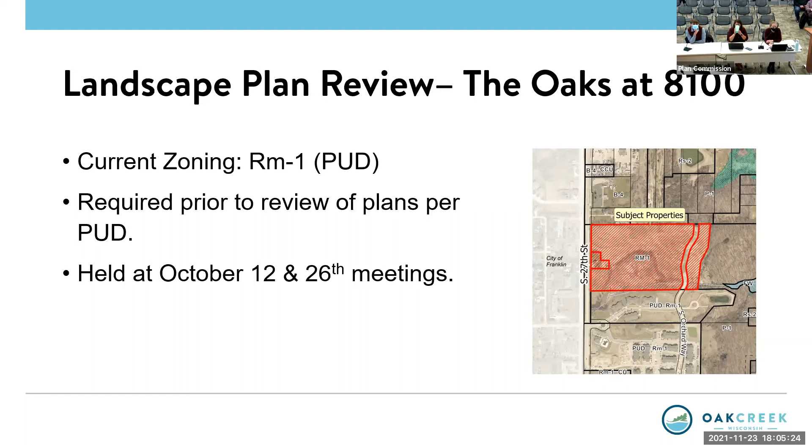This was required prior to review of site and building plans per the PUD, and we have landscape plans that are a little different than what was previously presented. Overall, this is how we are approaching the landscape plan for the entire development. We're going to talk about these in four quadrants, just to make it a little easier for review.

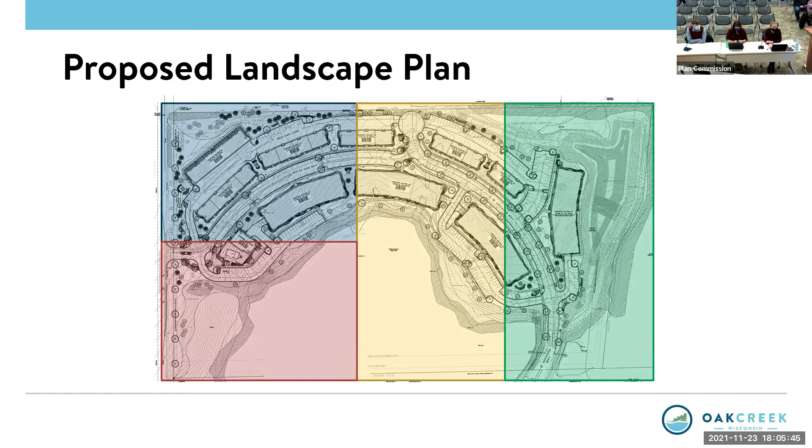The northwest quadrant is talking about the screening for those buildings. The A1 building is the tallest, and also has the most units. It steps down toward the townhomes in the B1 building. You'll see landscaping areas around the base of these buildings, and some tall landscaping items to screen them from the properties to the north. You also have landscaping around the clubhouse area, around the transformer areas, and then some street trees.

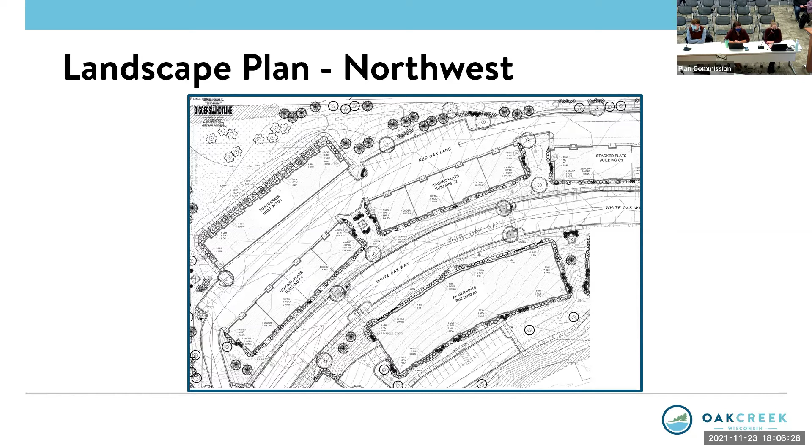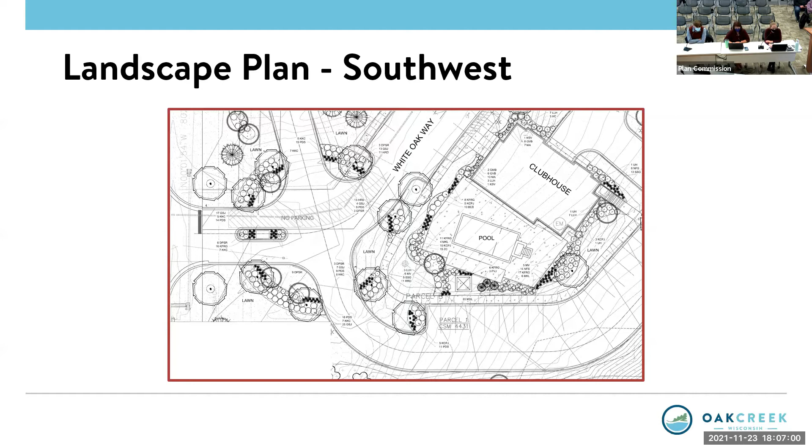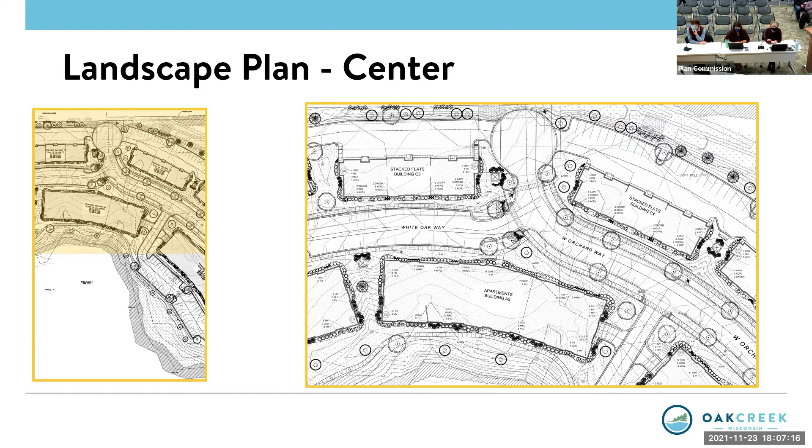In the center, we continue the landscaping around the perimeters of the buildings, adding a bit more along the north side. We don't have as much of a dense buffer here to the property to the north, because that property tapers off into more of a landscape area.

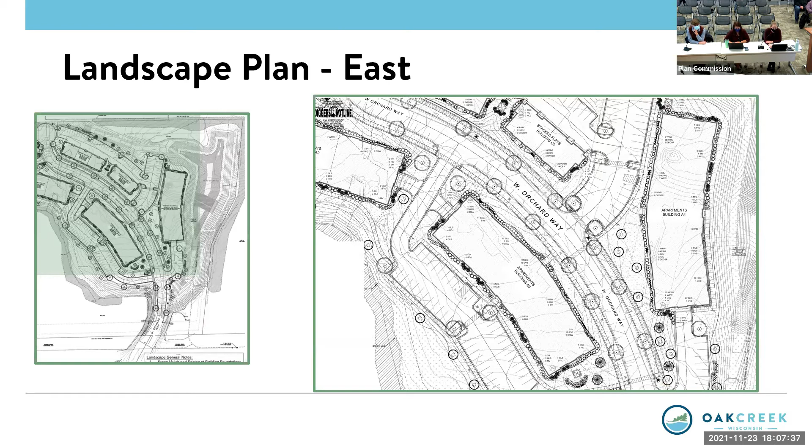And the street trees along West Orchard Way are per the requirements for the city, continuing from the center down West Orchard Way. And again, perimeter landscape along the buildings and in between.

So with these plans, we are recommending that the Plan Commission approve with the condition of approval that is on the screen. Mr. Mayor, thank you, Carrie.

Before we move ahead, applicant, would you like to make a statement, or are you just going to wait for any questions? I think just wait for questions. Okay, it's been indicated Mr. Decker will wait for some questions. So we'll go on to the commission.

Commissioner Hanna, you want to start us off? Yeah, I have no questions, thank you. Commissioner Sullivan: I have no comments, thank you. Commissioner Carrillo: Nothing for me. Alderman Lorik: No questions, thank you. Alderman Guzekowski: No questions, thank you. Commissioner O'Danny: Nothing for me. Commissioner Seifert: No questions at this time. Commissioner Chandler: No questions. Me neither.

So away we go, if somebody would like to make a motion on 7A. I move that the Plan Commission approves the master landscape plan for the Oaks at 8100 submitted by David Decker Properties for the properties at 8100 and 8146 South 27th Street and 8100 South Orchard Way, with the condition that all detailed, revised, and finalized plans are submitted in digital format to the Department of Community Development prior to submission of permit applications. Seifert seconds.

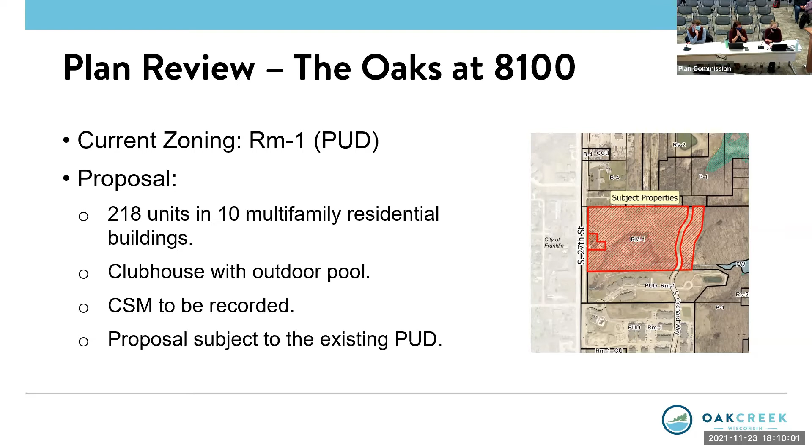We did look at the clubhouse with the outdoor pool. The CSM to redivide and combine these properties is yet to be recorded, so that's forthcoming before building permits can be issued. And this is part of a PUD, so we did have the conditions and restrictions as part of your packets to refer to.

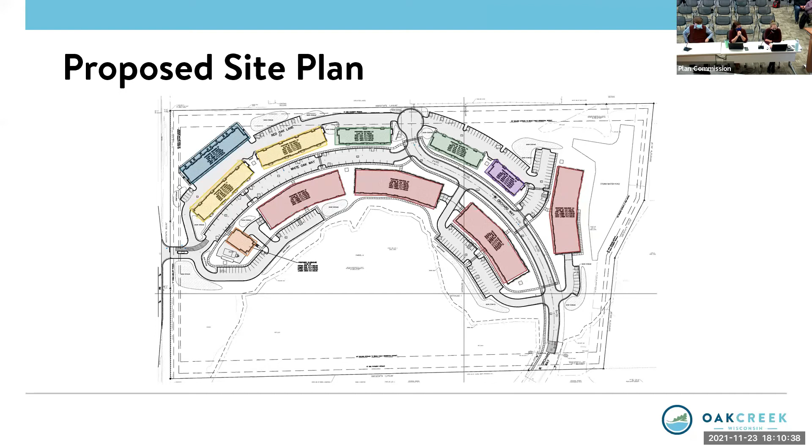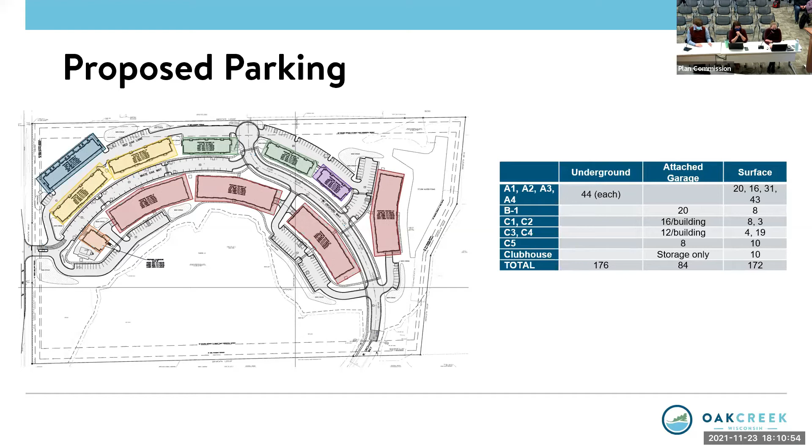On the proposed parking, we did talk about underground, attached garage, and surface parking. The attached garages are in the townhomes, so that B1 building. Underground parking for the buildings are in the table here, as well as surface parking. It does comply with the requirements for the PUD.

Elevations for each of the buildings, similar materials for each of them, cement board siding and brick. We did discuss this at length during the PUD discussion. No vinyl is proposed on here. So again, cement and brick to match what the code requirements are.

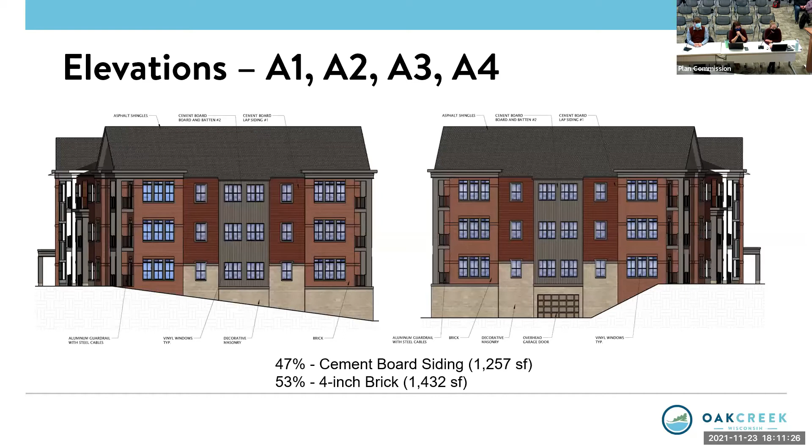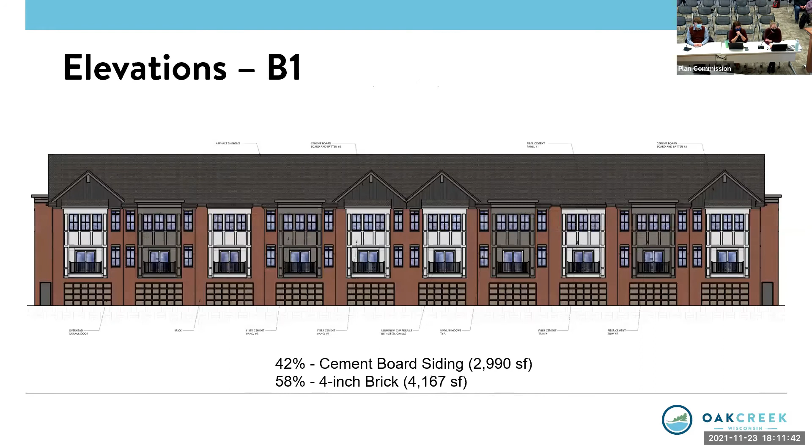It will be up to the Plan Commission to determine whether or not these percentages for each of the facades are acceptable. It does need a 3/4 majority approval for the use of fiber cement, and just a reminder of the 65% brick masonry and glass requirement for multifamily residential. But again, the use of cement board is up to the Plan Commission, and it's up to you to determine whether or not these percentages are acceptable.

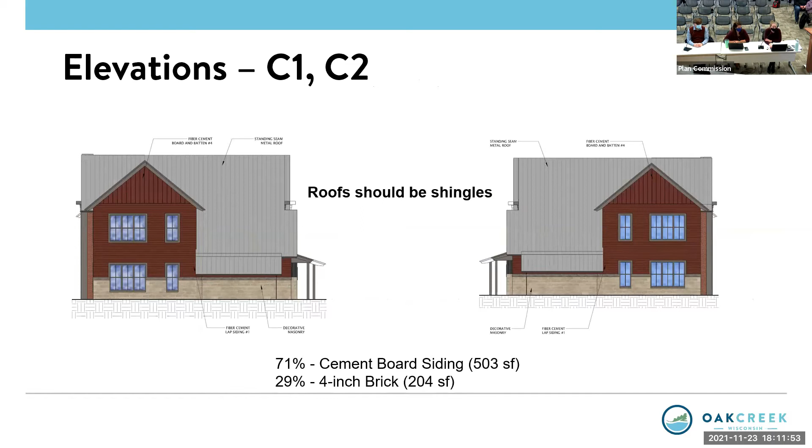So I'm going very quickly through these. This is just a holdover from a previous plan. It is an error. The metal roofs will be shingles to match the rest of the buildings.

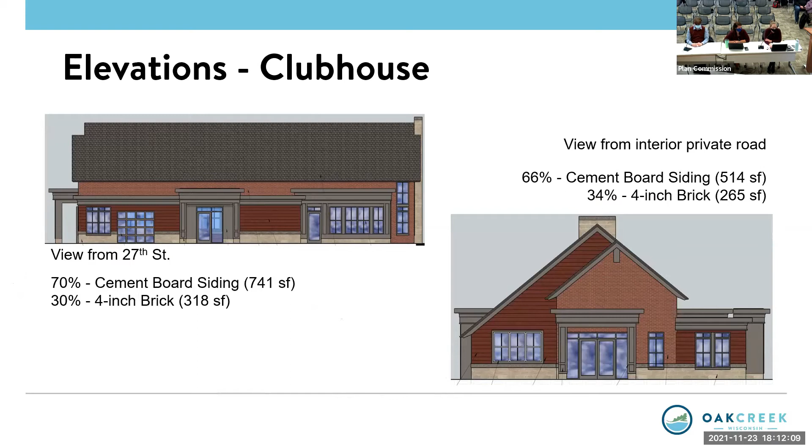Clubhouse, again, similar to the rest of the buildings. We did have an allowance in the PUD for the height restriction to be greater than the 17-foot for accessory structures.

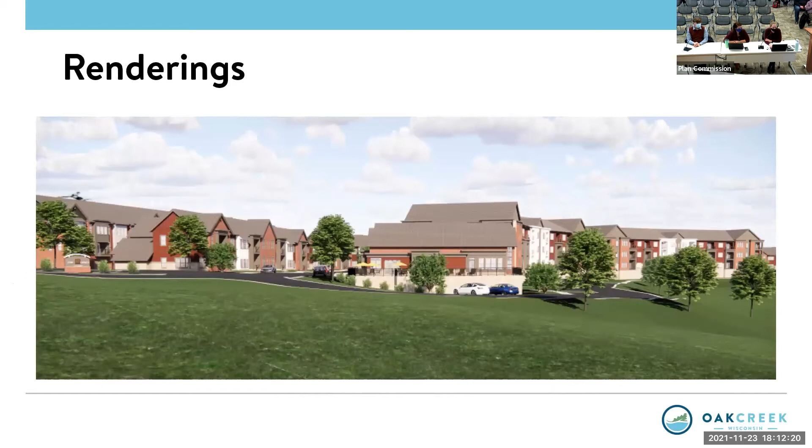To remind you of what the property and development will look like, here are the renderings we have seen previously, the entry to the development from 27th Street. The sign is a placeholder. It will meet the requirements of code per the PUD, and we worked with the applicant and their consultants on the dimensional requirements. It's a placeholder because we don't have the design finalized yet.

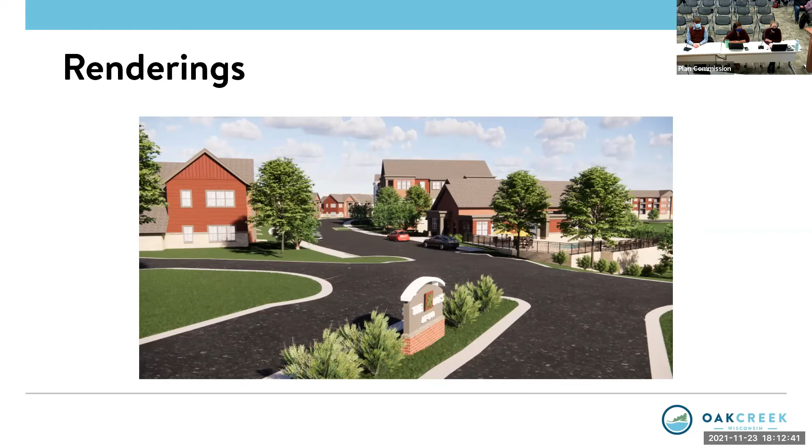And with that, there is a suggested motion for approval on the screen, one of two, with conditions for Plan Commission consideration. Mr. Mayor. Thank you, Carrie.

We'll open it up, Commission, for questions and comments. Chauncey, you want to start us out? No questions. Fred? No questions. Don? No questions. Chris? No questions, looks good. Greg? I have no questions, thank you. Dawn? Nothing for me. Matt? I have no questions. Christine? Nothing here, thank you. And again, nothing on me.

We've been over this quite a bit. We've really brushed through this one quite a bit, so I think we're all in good shape. Appreciate all the work that staff did, along with the applicant, to get us to the point we are. I know it's tedious sometimes, but I think we wound up at the right conclusion with a lot of this. So thank you all. So with that, motion, please.

Lorick moves that the Plan Commission approve the site and building plans submitted by David Decker, Decker Properties, for the properties at 8100 and 8146 South 27th Street and 8100 South Orchard Way with the following conditions. Number one, that all relevant code requirements and conditions of the planned unit development remain in effect. Number two, that copies of wetland fill permit approvals by the Wisconsin DNR shall be provided to the city prior to the submission of building permit applications.

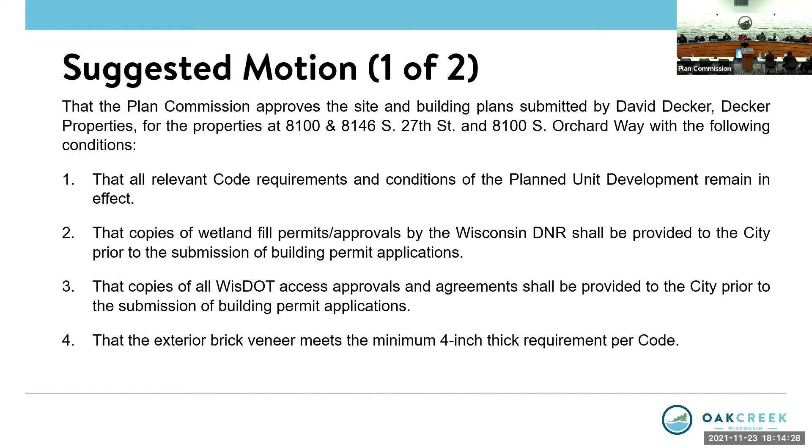Number three, that copies of all WISDOT access approvals and agreements shall be provided to the city prior to the submission of building permit applications. Number four, that the exterior brick veneer meets the minimum 4-inch thick requirement per code. Number five, that all mechanical equipment, transformers, and utility boxes, ground, building, and rooftop shall be screened from view.

Number six, that all stormwater, water, and sanitary sewer requirements are coordinated with and approved by the engineering department and Oak Creek Water and Sewer Utility prior to the submission of building permit applications. And number seven, that all revised plans, site, building, landscaping, etc., are submitted in digital format for review by the Department of Community Development prior to the submission of building permit applications.

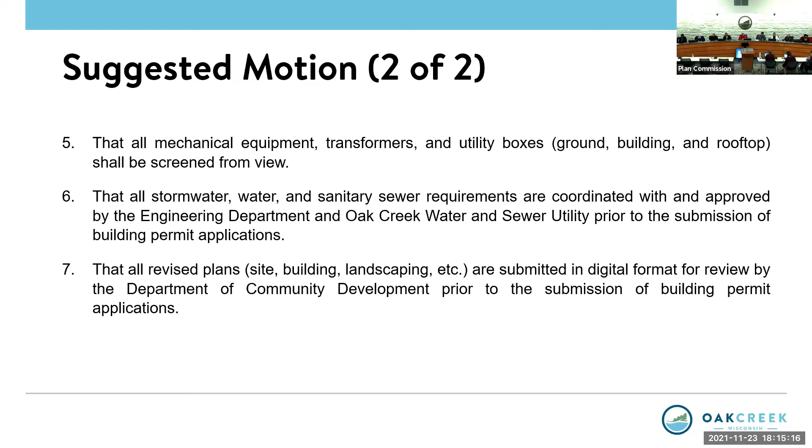New business, item 8A, consideration of a conditional use permit amendment, request by Timothy Grayman, All-Star Buick GMC, for an amendment to the existing conditional use permit to include the property with the former address of 7070 South 27th Street.

Thank you, Mr. Mayor. It's pretty straightforward. This is the current All-Star Buick GMC dealership. It is zoned B4 and has a conditional use permit attached to it. It is also located in the RRO overlay district. Unfortunately, that existing conditional use permit did not extend to the corner property because they did not have ownership of it at the time the permit was requested. So the request is basically asking for that to be incorporated into the CUP and be subject to those conditions and restrictions. There was a requirement that they post an escrow in case that corner were ever put up for sale by WISDOT so they could acquire it, and that happened in 2019.

No other changes to the conditional use permit are proposed with this request. One point of clarification: the certified survey map that combines the two properties still needs to be recorded. That needs to happen before anything can happen on that corner property. And the conditional use permit request does need to go before the Common Council to be approved, incorporating this into the conditions and restrictions. So just a point of clarification there. There's a suggested motion for approval on the screen.

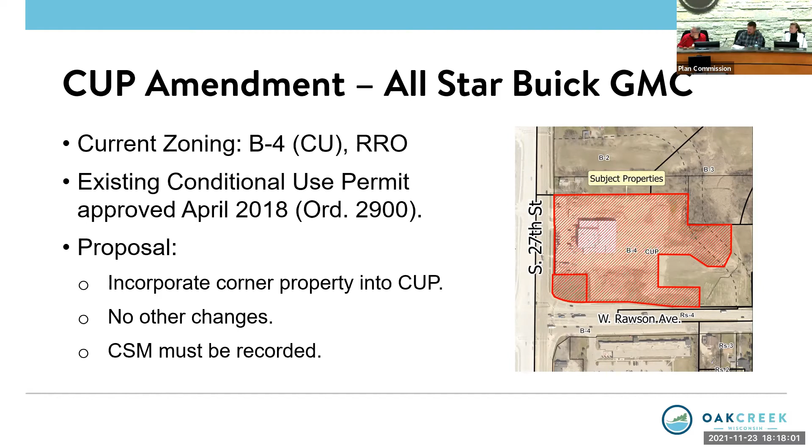I myself know Carrie made it pretty clear. Unfortunately, they did start the work, but nonetheless, they were going to obtain the property, so we are where we are. Nothing further, other than next time, let's follow the procedure. I like consistency. So with that, motion?

Sleeper moves that the Plan Commission recommends that the Common Council approves a conditional use permit amendment adding the land with the former address of 7070 South 27th Street after a public hearing. Point of clarification, it is 7070 South 27th Street. I'm sorry, I thought, okay.

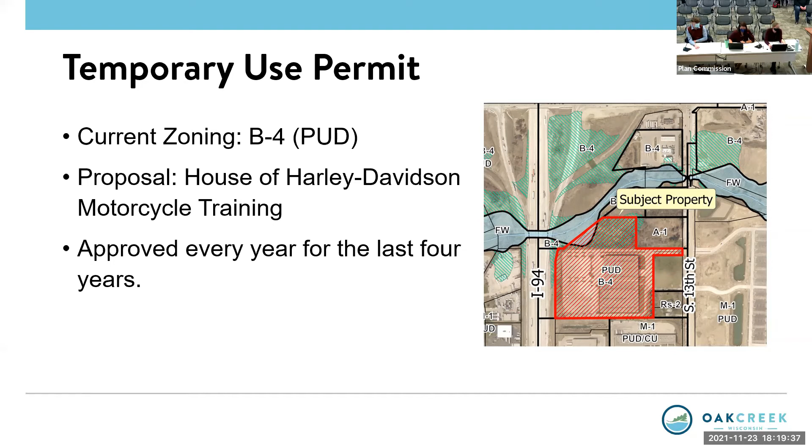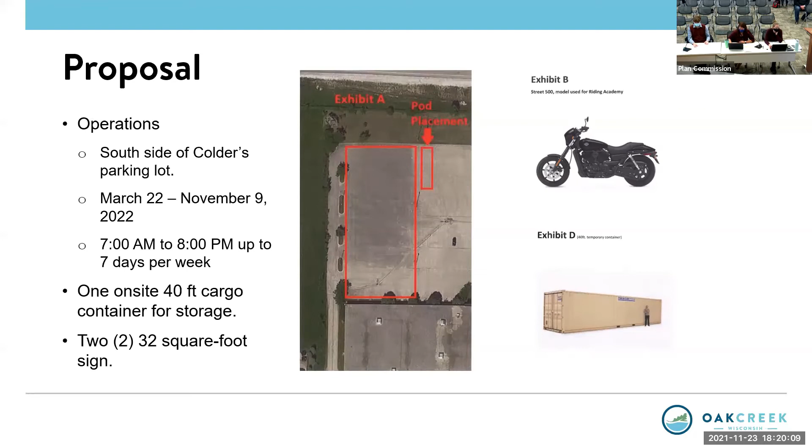Lori. You got it, it was the eye contact. Yes, Mayor, this is for a temporary use permit for the House of Harley Davidson. As you may recall, this has come up every year for the last 4 years. Staff have not gotten any complaints about their operations. The operations are going to stay the same, on the south side of Colder's parking lot between 7 a.m. and 8 p.m., up to 7 days a week. Really, it's only going to be 7 days a week if there's rain during the week, so they're extending that time period. This will also include the on-site 40-foot cargo container for storage of the motorcycles, and will also allow for 2 32-square-foot signs. I provided a suggested motion that we've used every year for the last 4.

Thank you, Lori. Very quickly, before we go to the commission, Carrie was emailed, and I'd like to read that email into the record as it was pointed out to my attention. It should be.

Subject was a temporary use permit at Colder's, addressed to Carrie. Although I cannot attend the planning council meeting regarding the temporary use permit for One Headlight Power Sports at Colder's, I wanted to provide some input. Our property is at 8975 South 13th Street and is an immediate neighbor, and we are also the manager of Creekside Corporate Park to the south of the proposed location.

This temporary use has been conducted before, and we have found it to be harmless. In the past, it has been well run and caused no problems for any of us, our tenants, in the building to the south. To us, it seems like a fine location for this kind of low-frequency event, and as a result, we would encourage the Plan Commission to approve the request. Please feel free to contact me. All the best, Mike Faber, Principal, Capstone Quadrant.

Okay, with that we'll go to Commission. Chauncey? No questions. Fred? No questions. Don? No questions. Chris? No questions. Greg? I have no concerns. Dawn? Nothing for me. Matt? No questions, thank you. Christine? Nothing here. No, nothing from me either.

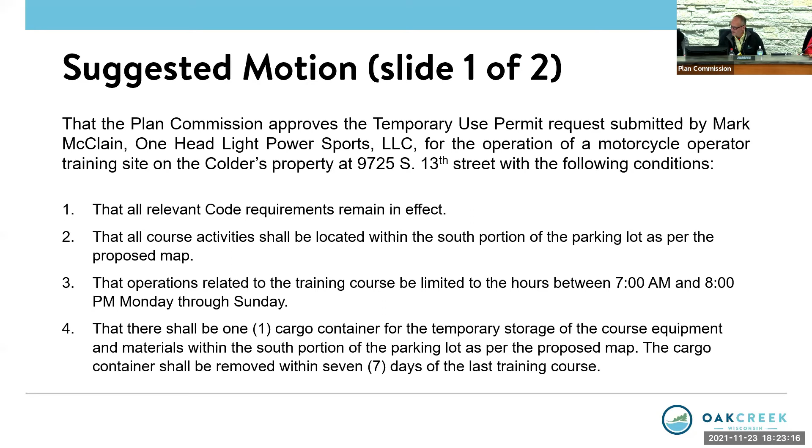1, that all relevant code requirements remain in effect. 2, that all course activities shall be located within the south portion of the parking lot as per the proposed map. 3, that operations related to the training course be limited to the hours between 7 a.m. and 8 p.m. Monday through Sunday. 4, that there shall be 1 cargo container for the temporary storage of course equipment and materials within the south portion of the parking lot as per the proposed map. The cargo container shall be removed within 7 days of the last training course.

5, that the signage for the operation be limited to two 4x8, 32 square foot each temporary signs on the cargo container. And 6, that the temporary use permit shall be valid between March 22nd, 2022 and November 9th of 2022.

Second. Roll call, beginning with you, Chris. Guzekowski, aye. Ladani, aye. Seifert, aye. Chandler, aye. Anna, aye. Sullivan, aye. Bill, aye. Clark, aye. Kevich, aye. Great, thank you very much.

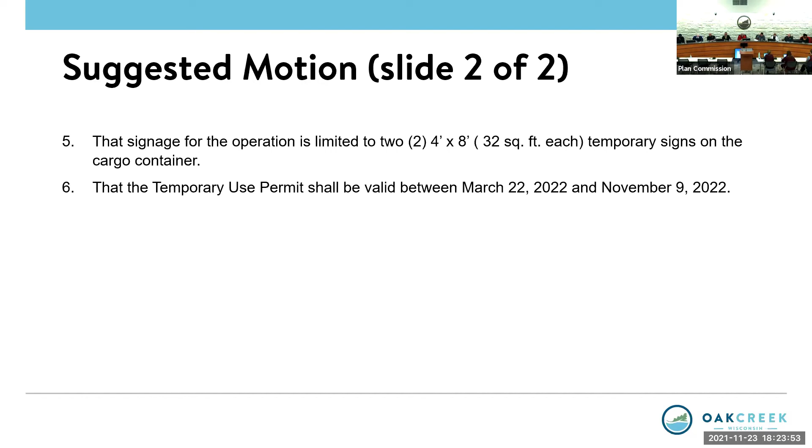That will get us to 8C, a plan review of building, site, and related plans submitted by Andrew Cromie, Oak Creek Franklin Joint School District, for an accessory structure on the Oak Creek High School property at 340 East Puetz Road. Carrie.

Mr. Mayor, we are going to have our intern, Jack Konevsky, give the presentation this evening. All right, Jack. Thank you, Mr. Mayor. This is a proposal for the Oak Creek High School.

This is an 81 foot and 5 3/4 inch by 24 foot and 6 inch accessory building. It will be located south of the storage building and west of the existing football field and track. All setback requirements are met in the proposed location. It is designed to match existing dugouts, concession stand, and the other storage building on the property.

The proposal is to use white and gray LP Smart panels for the materials, which is not listed as an accepted primary exterior material. But as you can recall, Plan Commission approved the use of LP Smart panels on similar storage buildings at Oak Creek High School and middle schools. It will require a 3/4 majority vote for approval. With that, there's a suggested motion for approval.

Thank you, Mr. Mayor. Thank you, Jack. Andrew, you want to say anything or wait for questions? Name and address, please. Yep, Andy Cromie, 7630 South 10th Street.

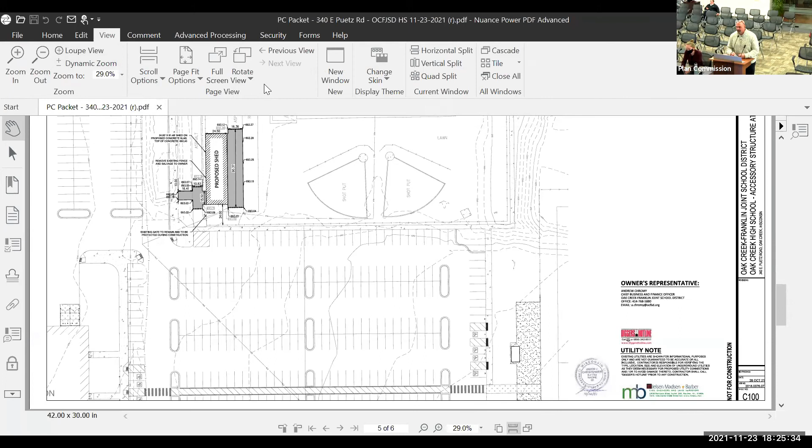This project is just really an extension of our night's construction projects we brought forth a month or two ago. Very similar structure. You know that we currently have a structure sitting there next to the football field. That structure is outdated. If you were to walk inside of it, it is clearly not suitable for storing anything anymore. So we're looking to have a storage unit put to the south of that.

Ultimately, at some point down the road, we would raze the existing barn with the potential of putting team rooms in for our football teams, both home and away, to have access during the games, but that's far off into the future. This would simply be replacing that storage unit with something that's much more suitable for storing outdoor band equipment and track equipment specifically, that keeps rodents out and is much more weatherproof.

Great, thank you. Let's start us off, Christine. No questions from me. Matt. No questions, thank you. Don. No questions from me. No questions. Chris. I've been in there many times, long overdue. No questions. No questions. Fred. No questions at this time. Chauncey. No questions. Fortunately, I do got one.

The LP siding. It's not in our code. Is it ready to go into our code, Jack? No, but I'm serious, I'd like to know, because we struggled with this on the veterinary clinic, didn't we? And we've done it in some other places.

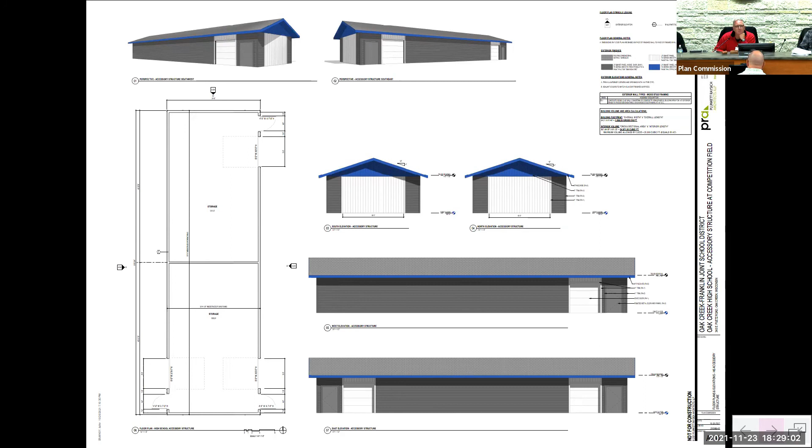I thought we went round and round with siding, I thought it was on the vet clinic. We did, because that was something we had not seen before. Right, and typically it's fiber cement. And it made it, yes it did. I would just add the building materials are exactly the same as the sheds going up at east-west and the tennis court between the football field and the tennis courts.

We can look for a motion on 8C, please. Clark moves that the Plan Commission approve the site plan submitted by Andrew Cromie, Oak Creek Franklin Joint School District, for the property at 340 East Puetz Road with the following conditions: number one, that all relevant code requirements remain in effect; and number two, that all detailed revised plans are submitted in digital format to the Department of Community Development prior to submission of permit applications.

Hold seconds. Roll call, beginning with you, Don. Hold aye. Seifert, aye. Chandler, aye. Anna, aye. Sullivan, aye. Grillo, aye. Clark, aye. Kavich, aye. Guzekowski, aye.